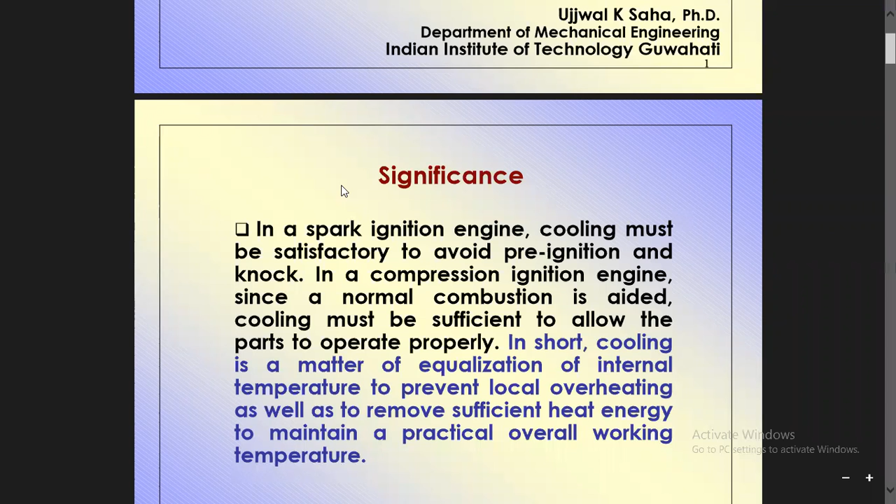Now what are the reasons for cooling? Why do you want to have this cooling in case of IC engines? First one is to promote high volumetric efficiency. What is volumetric efficiency? It is the breathing capacity of an engine. Normally, higher the volumetric efficiency, better will be the power output. This I also explained during the working of the engines. So if you have high heat or low heat, the incoming air fuel mixture, which is called the charge, will be restricted, and volumetric efficiency will be reduced. So for these reasons, to increase the volumetric efficiency, the cooling must be provided in a proper manner.

Then the second point is to ensure proper combustion. To have proper combustion, what is our goal? To have complete burning of the air fuel mixture which is supplied into the engine cylinder. Suppose if it is not heated properly, some fresh air fuel mixture will go out through the exhaust process, contaminating the atmosphere. Not only that, our engine efficiency and power output is reduced. To ensure proper combustion, we have to maintain the temperature of the engine at a prescribed level.

Third point, to ensure mechanical operation and reliability. What is this mechanical operation? Most of the parts, whether reciprocating or rotating, come in contact with each other. Because of friction between these meeting surfaces, and also due to combustion processes, heat is increasing. If you want to increase the life of the components of an engine, you have to cool the engine in a proper manner. Now, suppose if you overheat, what happens?

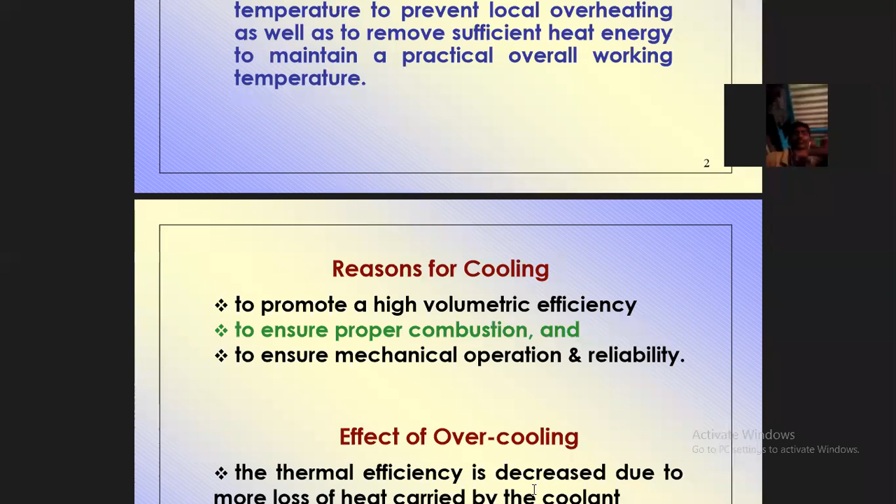Suppose if overcooling happens, that's also a problem, overheating is also a problem. So if overcooling happens, say for example early in the morning or in the winter season, it is not necessary to have the cooling effect. Otherwise, the combustion will not take place, so the thermal efficiency is decreased. What is thermal efficiency? You already know, this is the efficiency which indicates how best the engine is working. So it is due to more loss of heat carried by the coolant. Since these coolants, maybe water or lubricating oil, are circulating once the engine starts, suppose during the starting process or in winter season, if overcooling happens, the thermal efficiency, that is heating value, will be reduced.

The vaporization of the fuel is less, resulting in lower combustion efficiency. Vaporization means if the overall engine temperature is reduced, the vaporization of the fuel is affected. In case of the diesel engine especially, when you are sucking only air in the suction stroke, and the fuel is injected through an injector, if the temperature in that region is lower than prescribed, the droplet size will be increasing.

If the droplet size of the fuel is larger, then mixing problems will arise. This leads to an increasing delay period, and the combustion time will get reduced. Because of this, combustion efficiency is going to be reduced.

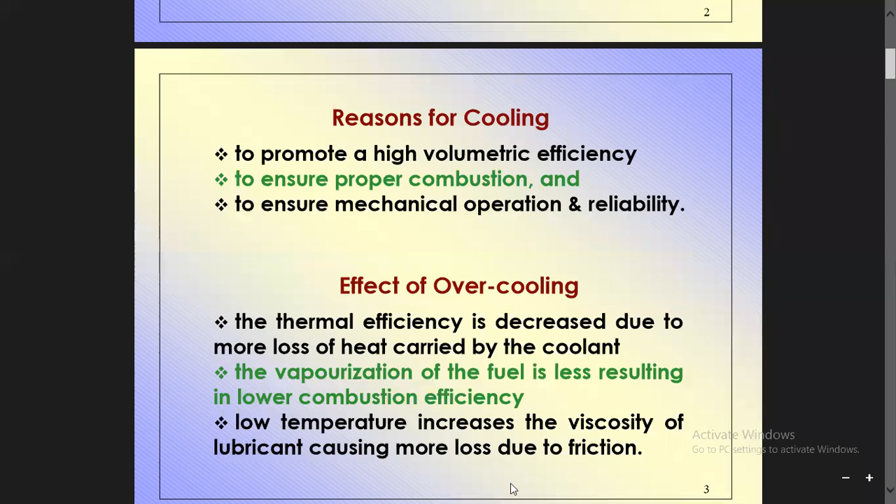The third point is that low temperature increases the viscosity of lubricant, causing more loss due to friction. Suppose the temperature is low, the viscosity becomes high, then the lubricating oil will not move properly to the surfaces where it should circulate. Because of this, more loss due to friction occurs, and the components get disturbed or damaged.

Now talking about cooling, which we discussed, cooling is a phenomena which takes place in any type of engine, it is required. There are two types of cooling systems. The first one is air cooling, also called direct cooling system. The second one is liquid cooling, also called indirect cooling.

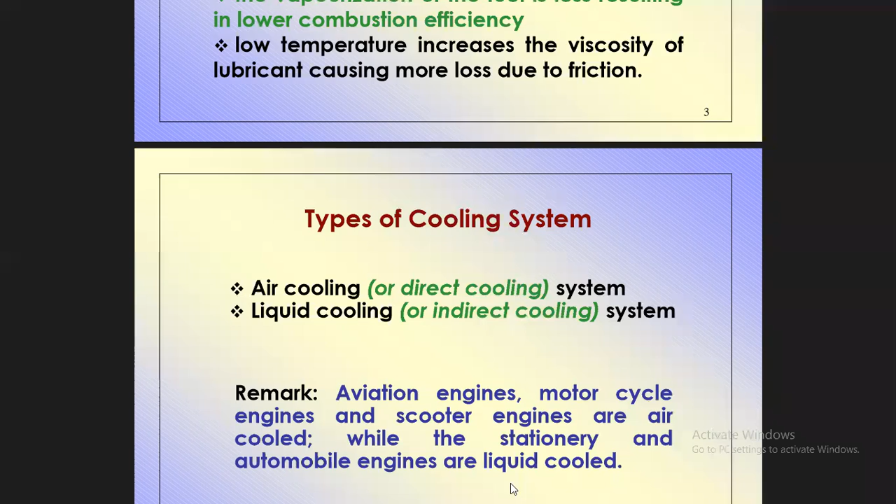For example, as shown in the remark here, aviation engines meaning airplanes, helicopters, etc., motorcycle engines and scooter engines are air-cooled engines. Why is this required in aviation engines? As we know, if the weight of the engine is increased by liquid cooling, then problems will arise. In motorcycles also the space is very less, even scooter engines also have less space, and if weight and space are increasing, it will not be feasible to have better efficiency.

While stationary and automobile engines are liquid cooled engines, like our motor cars, trucks, lorries, etc., and other automobile engines are of the liquid cooled type.

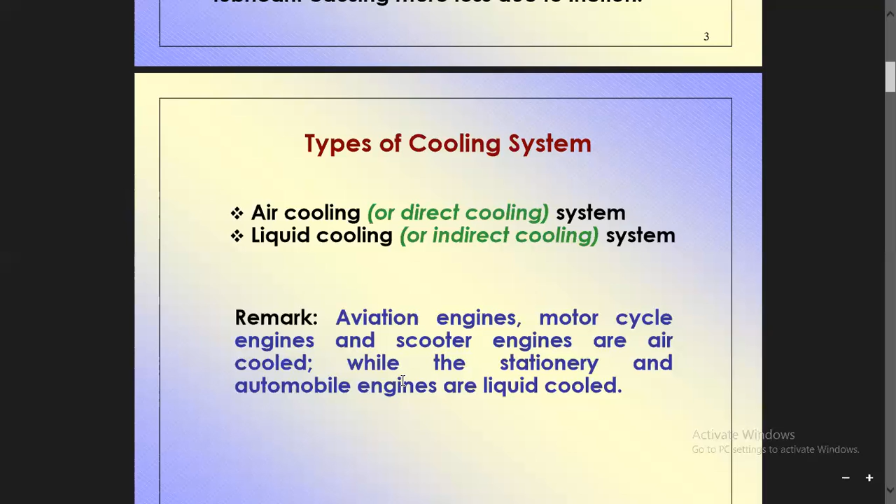Now, what is the air cooling system? Air cooled engines depend on airflow across the external surface of the engine cylinders to remove the necessary heat. The amount of heat dissipated depends upon several factors.

As already discussed in case of IC engines, engines are classified based on cooling type: air cooling system and water cooling system. In air cooling systems, we expose the incoming air to the engine top head so that the fresh air will absorb the heat from the engine surface and cool the engine.

So what are the points required for this air cooling system? The first one is the area of cooling surface in contact with the air. The more area that is in contact with the air, the more heat can be dissipated to the atmosphere so that the engine can be cooled.

It also depends upon the mass flow rate of the air - how much quantity of air comes into contact with the surface and removes the heat from that surface.

Then the other point is the temperature difference between the cylinder and the air. We already know the temperature of the cylinder. Since the engine works at high temperature, and the temperature of the atmosphere or air it comes in contact with is less, heat will be transferred. As we already studied in heat transfer, heat is transferred from higher temperature towards lower temperature. Since cylinder temperature is high and air temperature is less, depending upon this difference, that much quantity of heat will be dissipated to the atmospheric air.

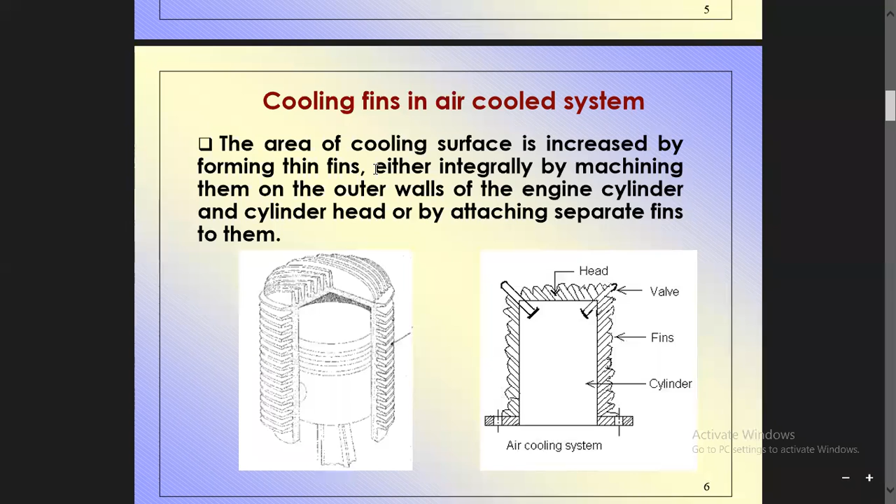Regarding the first point, the area of cooling surface - how you increase the area of the contact surfaces - you can see here, cooling fins are used in air-cooled systems. As you know, you already studied the fin chapter in heat transfer. If the contact surface area increases, as shown in point number one, the area of cooling surface in contact with the air increases. If the fins are not there, you can see the surface area is limited here.

So the contact surface area is limited, and because of that, the heat dissipation rate will be reduced. So instead of that, we increase the contact surface of the engine by providing these fins. Fins may be in a rectangular shape, or maybe triangular shape, or maybe circular shape, etc.

You can see here, this is the cylinder and this is the cylinder head. Around the cylinder and the cylinder head, we are providing the fins. The number and sizes of these fins depend upon the design criteria of the whole engine. The area of cooling surface is increased by forming the fins.

You can form the fins integrally or by machining. In some engines, they are either integrally manufactured or machined after manufacturing the cylinder and cylinder head, by attaching separate fins. In some engines, we are attaching the fins over here.

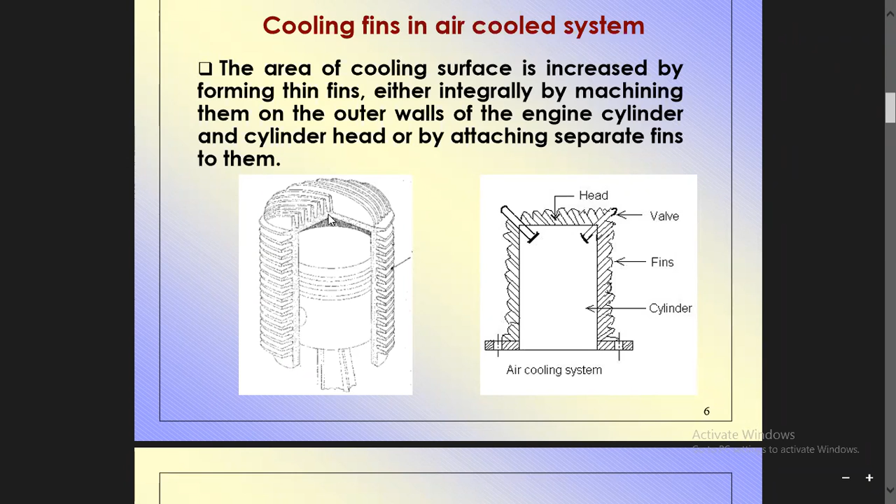So, air cooling system advantages. What are the advantages? The absence of radiator, cooling jackets, coolant and pumps makes the engine lighter. Some of the components used in a water cooling system will not be there. The radiator will not be there.

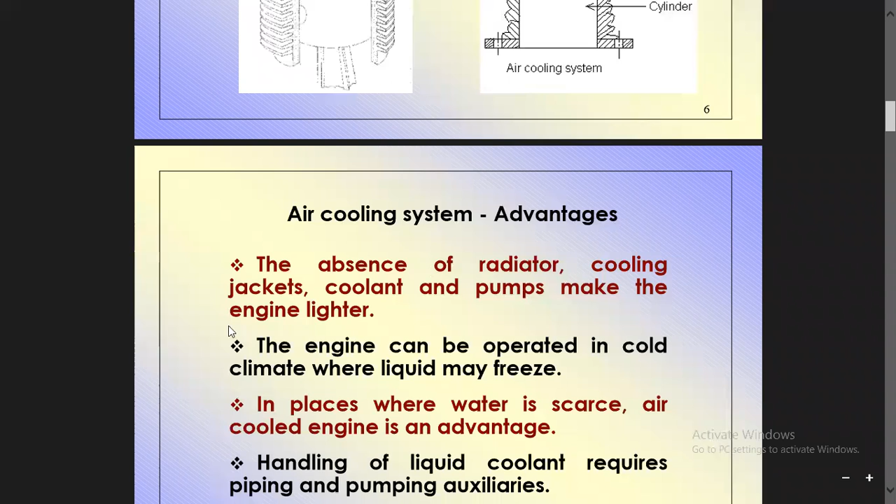Now, air cooling system, what are the advantages? The absence of radiator. Some of the components used in water cooling systems will not be there, like radiator, cooling jackets, coolant, and pumps. The pumps which are used for pumping water will be absent. Because of that, the engine will be lighter.

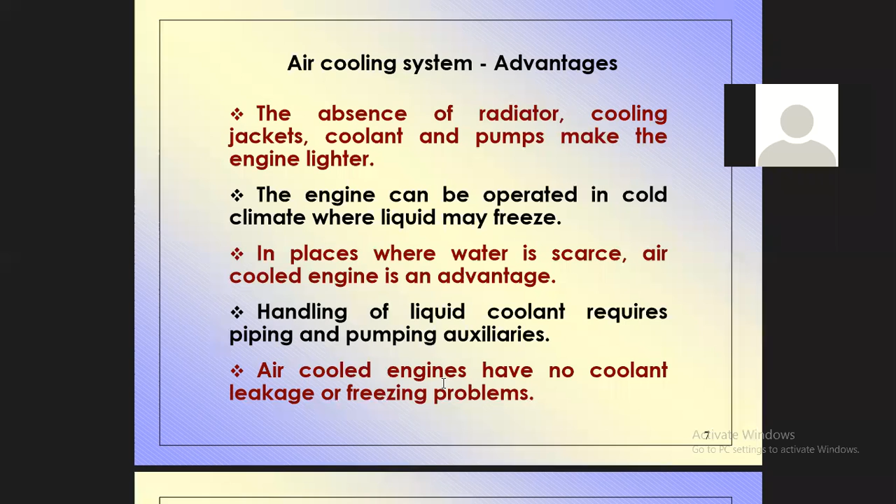Air-cooled engines have no coolant leakage or freezing problems. In water-cooled or liquid-cooled systems, leakage can occur during flow through lines like piping or pumps, and freezing problems, which will not be there in case of air-cooled engines. So these are some of the advantages of the air cooling system.

Where there are advantages, there will always be disadvantages as well. A relatively large amount of power is used to drive the cooling fan. If you want proper cooling, it requires the fan to rotate, and this fan requires power, and this power is used by the engine only. So when the fan is rotating, it supplies air to the cylinder head and heat is dissipated through this process.

Engines give low power output, meaning proper cooling phenomena will not take place in the engine because only the contact surface, for example the cylinder head and part of the cylinder, will be exposed to atmospheric air, and only that portion's heat will be dissipated.

Especially in case of multi-cylinder engines, this air cooling system is not at all feasible because cylinders are arranged one next to the other, attached with a gap in between. So heat will be generated and it will be difficult to dissipate heat in that region. Because of that, air cooling system is not at all feasible.

Cooling fins under certain conditions may vibrate and amplify the noise level. Suppose if the fins are externally fixed to the cylinder head and cylinder surfaces, sometimes because automobile engines are not only working stationary, they are also working with the automobile in motion.

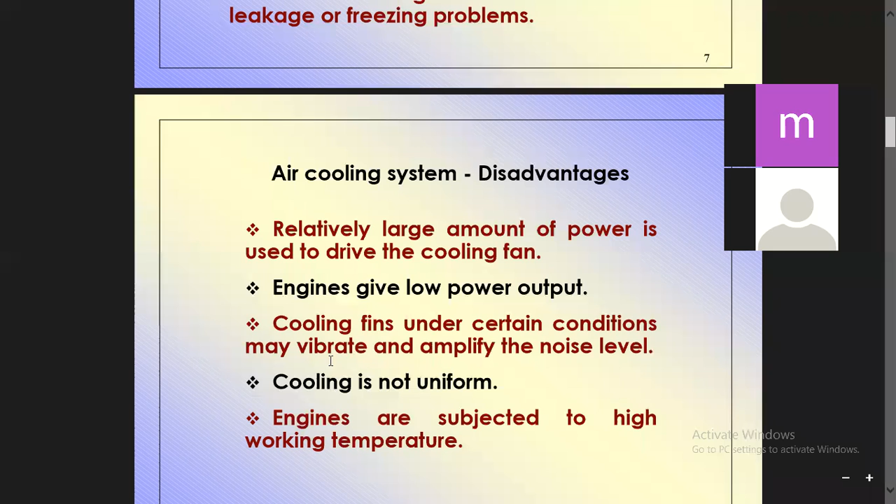Engines are subjected to high working temperature, especially in case of multi-cylinder engines. Suppose if air cooling mechanism is used, the temperature keeps increasing, and after some time the engine may get spoiled. The whole engine components may get affected by this high temperature.

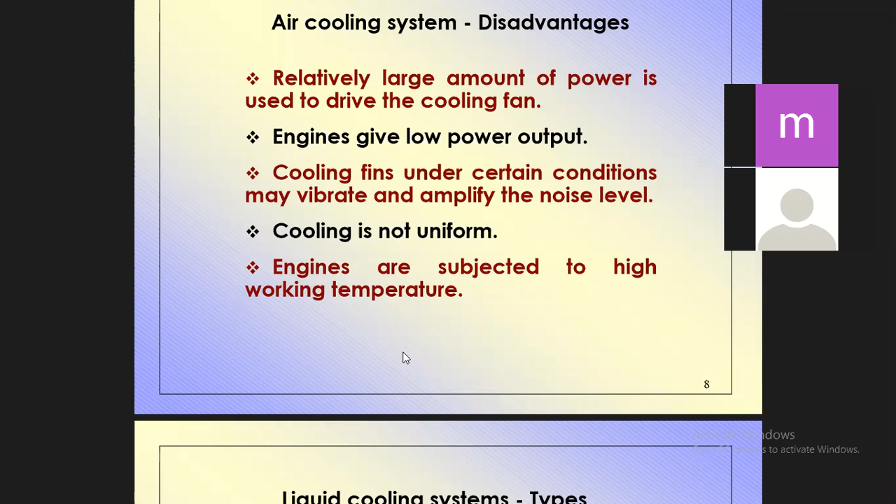So this is about the air cooling system. Air cooling system is a simple one. No extra power is required except for the fan to rotate, and this power will be taken care of by the engine itself, and the components will be reduced. Because of that, the engine becomes lighter. But the problem is that even cooling will not take place in multi-cylinder engines.

Coming to liquid cooling system, especially in case of multi-cylinder engines where the number of cylinders is more - 2, 3, 4, 16, etc. - in that case, to have better cooling, we should go for liquid cooling systems. In small engines or very less numbered cylinder engines, we have different types of systems. There are four categories: one is direct or non-return system, second is thermosiphon system, third is forced circulation cooling system.

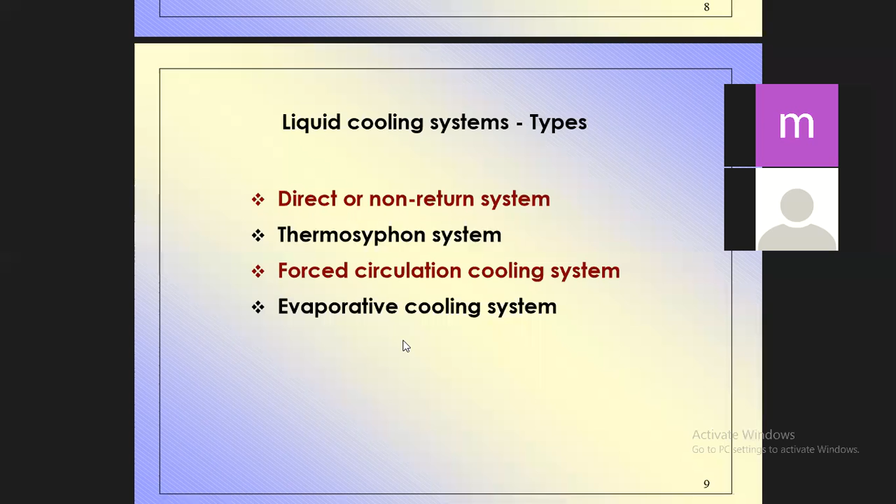Then evaporative cooling system. So in engine design, as you know, engines may be small or big, low speed or high speed. Depending upon the design criteria, we are using different types of water cooling systems. Compared to air cooling system, here the components are increasing.

Components in the sense, we must have the radiator, we must have the pump, and we must have the thermostat valve and the flow lines, etc. Separate power is required to operate the pump which is used here. So in this category of cooling, the weight of the engine is increasing, the components are increasing, and the design is a little bit complicated compared to air cooled engines, but we will have a better cooling phenomenon.

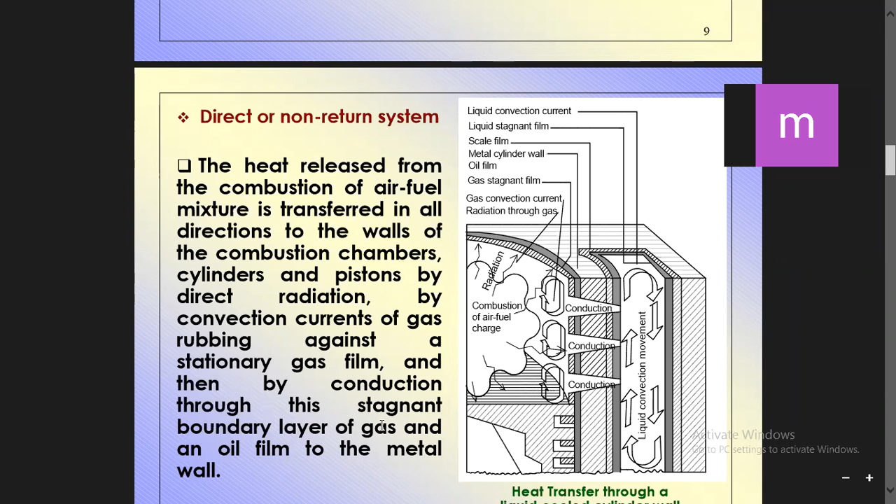So cylinders and pistons are cooled by direct radiation, by convection currents of the gas rubbing against the stationary gas film which is provided between the piston and the cylinder, and then by conduction through this stagnant boundary layer of gas and an oil film to the metal wall, which will be flowing in this case. So this is called direct or non-return system.

Now coming to the second category, that is the thermosiphon system. The main components of this system are, as you know, the piston and the cylinder.

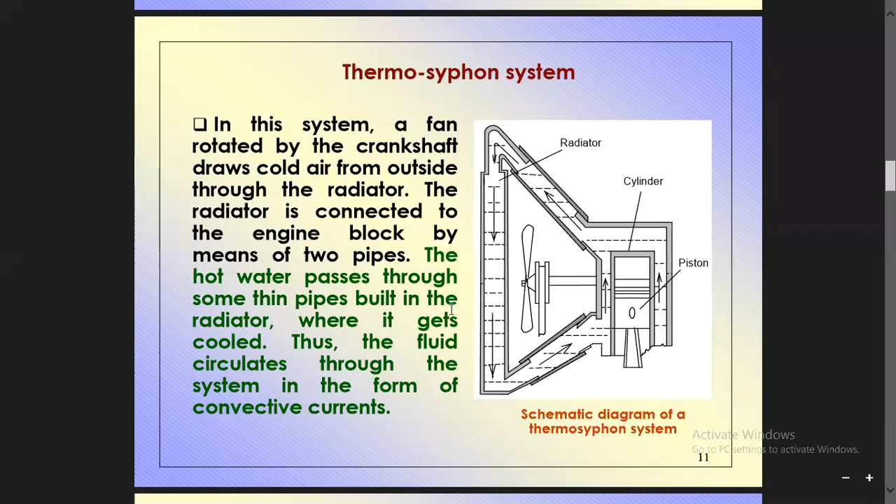So in the pipe, the water flows and comes in contact with the air passed from here, and because of this convective phenomenon, the water gets cooled, and is further circulated to the hot spots of the engine.

Coming to the next topic, forced circulation cooling system. This thermosiphon system is not much used in multi-cylinder engines or high-speed engines, since in multi-cylinder engines where the power requirement is more, or in high-speed engines, combustion takes place very quickly, within milliseconds.

Because of that, the heat involvement is increasing. Suppose if you use either an air-cooled system or the thermosiphon system, we are not able to remove the heat from the contact surface, the hot spots of the engine.

What are the hot spots of the engine? Near the top, that is the top dead center, and about the cylinder head where the exhaust valve is provided, more heat will be generated.

Frequently we have to remove the prescribed heat to maintain constant temperature throughout the working of the engine. If you want the engine to work properly, the heat has to be removed frequently.

For example, in multi-cylinder engines and high-speed engines like 4000 RPM, 5000 RPM, where the power output or combustion happens very quickly, the amount of heat generated by the combustion of the air-fuel mixture within the cylinder increases. Because of this high speed, and combustion happening in a very short duration, heat generation is also taking place very quickly.

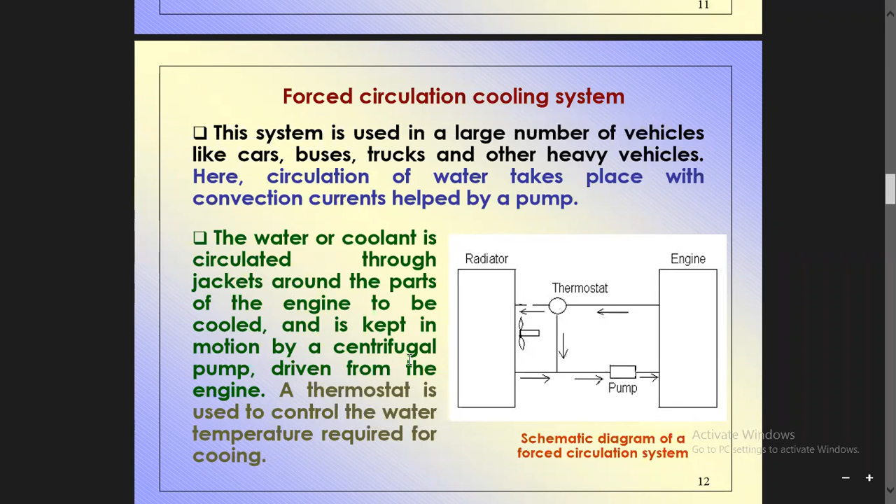When the engine starts, water moves in this direction to all the flow lines or water jackets, absorbing heat as it moves. Suppose the temperature is below the prescribed level - from the thermostat valve, water comes back and is recirculated here. Once it reaches the prescribed temperature, the water then moves in this direction, into the flow lines of the radiator.

You can see air from this side and from this side being applied through this fan. Heat is dissipated to the atmosphere, the water gets cooled, and the cooled water comes back in this direction.

That's why it is called pump cooling or forced cooling system.

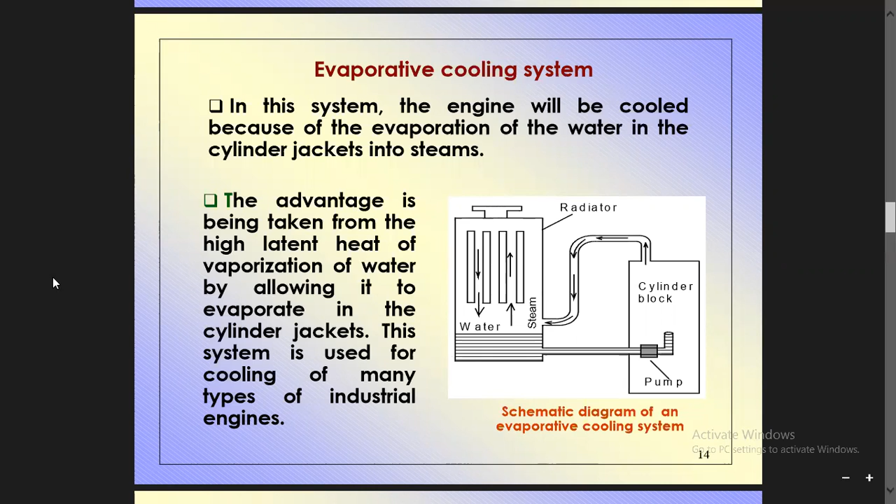In the evaporative system, the engine is cooled because of the evaporation of water in the cylinder jacket into steam. In the cylinder block, water is made to flow over it. After heating, water becomes steam, and this steam takes advantage of the high latent heat of evaporation of water. By allowing it to evaporate in the water jackets, this method is used for cooling many types of industrial engines. This type of system is not used in normal automobile engines.

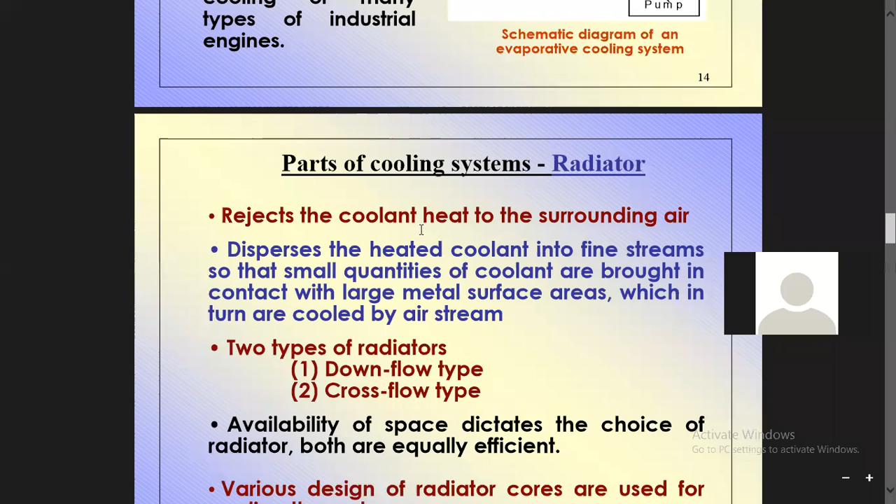Face is visible, okay. So now parts of the things which is the radiator is the first one. Radiator parts will be required there as components, and this is what I told, the thermostat valve.

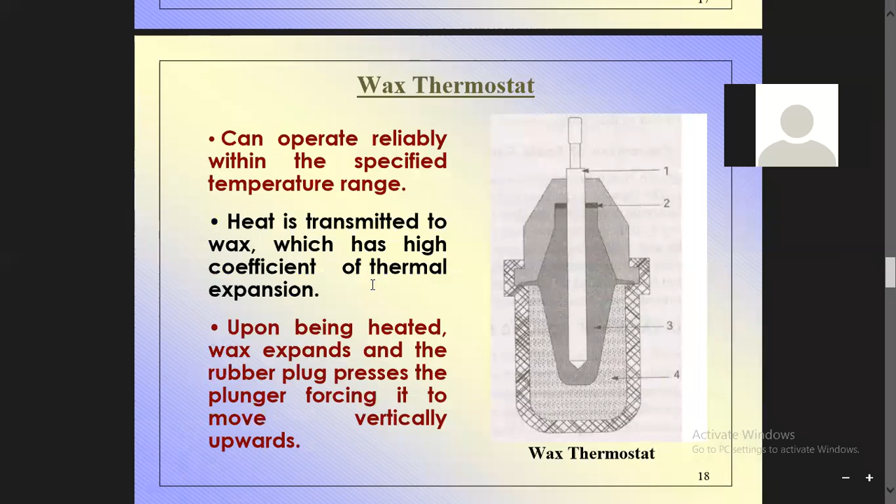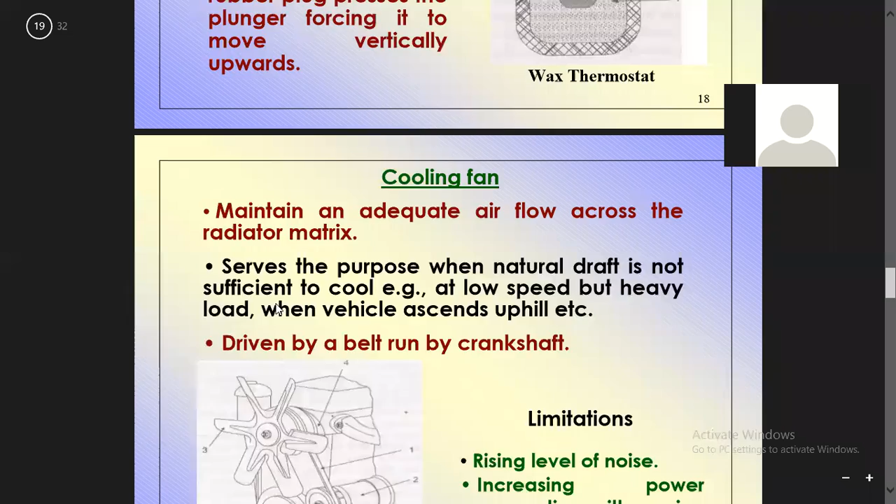The cooling fan is another part which is required to make the water cooled. The cooling fan is fixed like this in the engine.

Liquid cooling system advantages: better cooling, makes it possible to reduce the cylinder head and valve seat temperatures. As you know, water will be flowing all around through the flow lines, so better cooling will take place.

Volumetric efficiency of a water cooled engine is higher. If volumetric efficiency is increasing, power output of an engine is also increasing.

Compared to air cooling, design of engines with appreciably smaller frontal area is possible, because if fins are provided, the surface area is increased there. But if the jackets and flow lines are made inside only, the engine can be more compact.

In case of water cooled engines, installation is not necessary at the front of the mobile vehicle. In case of air-cooled engines, they need to be placed in front of the vehicle, so that the incoming air, when the vehicle is moving, applies onto the surface of the engine parts to cool them. But here it is not necessary to install the engine at the frontal side.

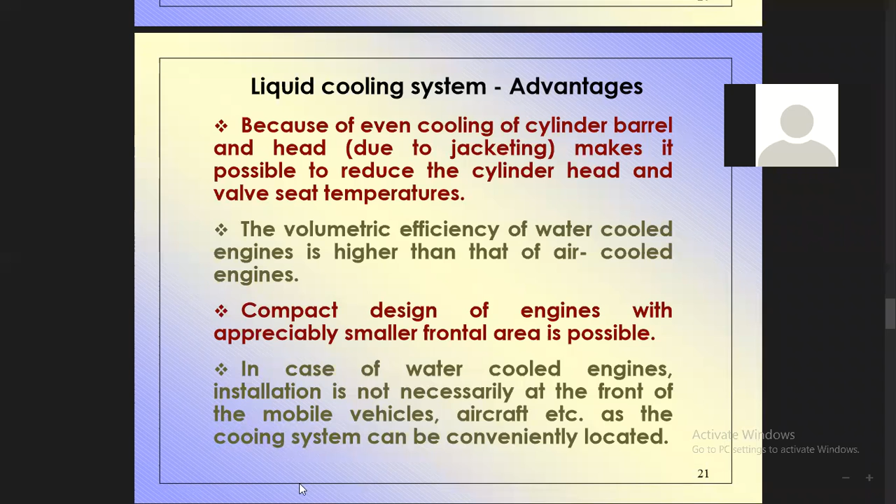Like in aircraft engines, etc., they can be placed wherever is convenient.

Disadvantages: more maintenance, and engine performance is sensitive to climatic conditions, because the cooling system depends upon the climatic conditions. Sometimes temperature may be 0 degrees centigrade, sometimes it may be 50 degrees centigrade. Depending on the variation in temperature, performance will be very, very sensitive.

The power absorbed by the pump is again considerable, and the power output of an engine is reduced because we are taking power to operate the pump from the engine power itself. That's why the power output of an engine gets reduced.

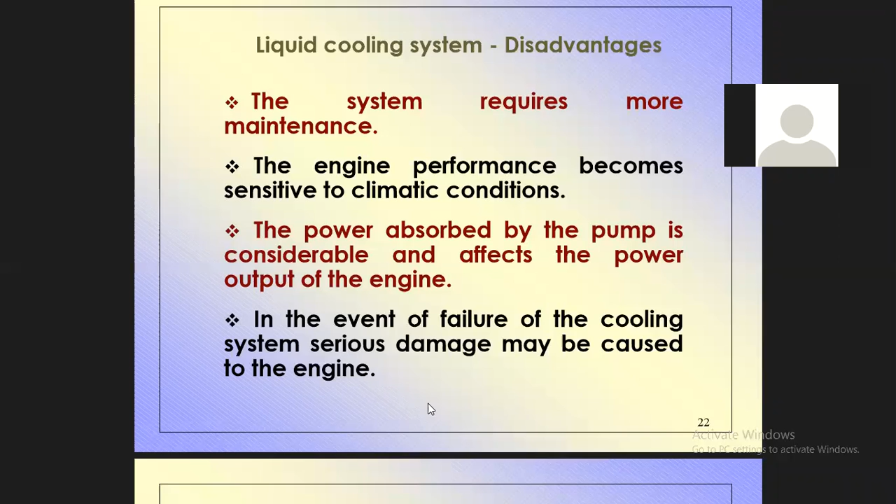In the event of failure of the cooling system, serious damage may be caused because we are not knowing. Suppose if any coolant or water leaks in between, the cooling system gets affected, causing overheating of the engine, then we can call it engine seizing. This problem arises in the case of diesel engines.